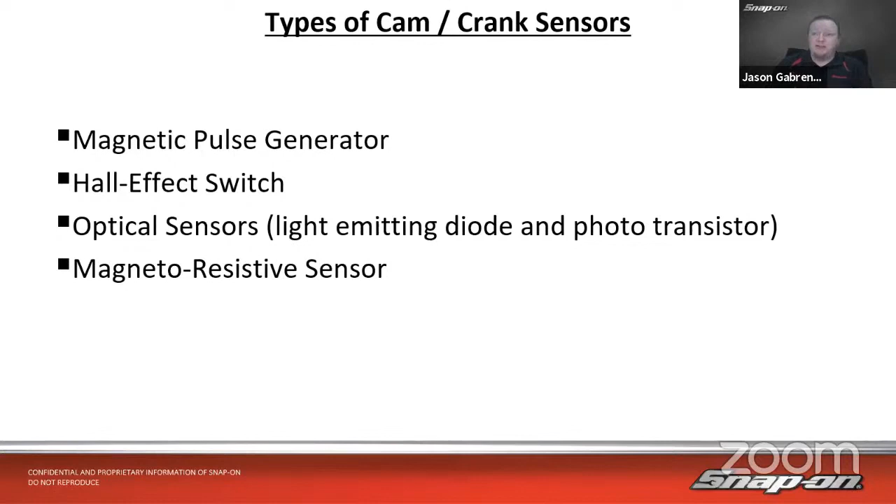So the types of cam and crank sensors we're going to talk about today - there's four main types we're going to cover. There may be others out there, but these are four of the more common ones. We have magnetic pulse generator, we have a Hall effect switch, we have optical sensors - light emitting diodes and phototransistors. If you've ever heard of the OptiSpark system GM used, a couple other manufacturers use it as well, that could be used. And then also the magnetoresistive sensors as well.

First off, we'll start with the magnetic pulse generator. This one happens to be off a Subaru. What it does - you see a cross section over here on the left-hand side, so we have the pinouts for the connector here. It goes in and we have a magnetic core in here, so it's magnetic. And as pieces of metal go by this magnet, it will generate a waveform out the back end.

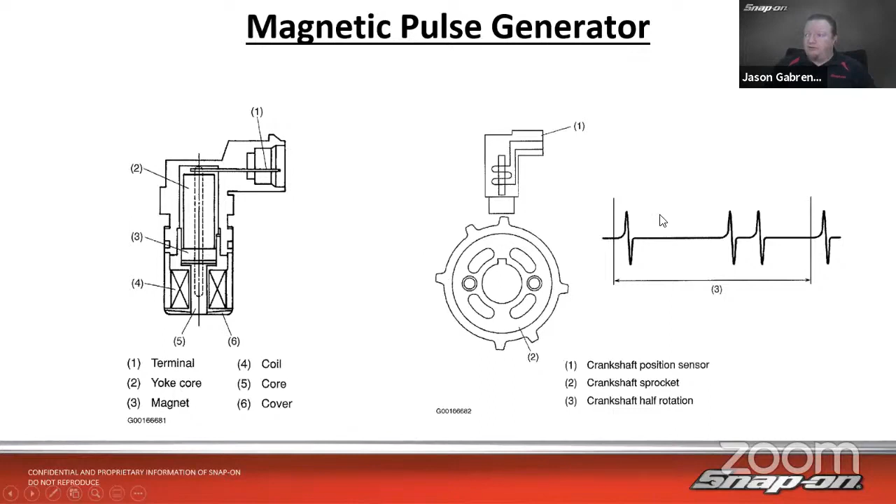Depending on how it's set up and where it's set up will differ in how the signal gets sent out. But in this case, we have just a few - this is the crank sensor right here, so the crankshaft sprocket is where this is. This has a few little blips and it'll send out a blip. This will generally be an AC voltage output, so it works on induction, and it induces an AC voltage output out through it.

Now, the voltage output will also be relative to the engine RPM on these. So the higher my RPM is, the further my amplitude goes up - it'll actually increase the voltage, and the voltage will lessen as we lessen the RPM. Also, with all of these, if we're looking at it on the screen, as the RPM increases, of course the frequency will increase as well.

So those little blips will get closer and closer together the faster it goes, because it's going faster. On these, the coil winding polarity is designed for that specific application. You can't reverse these. Remember how I said there's a positive and a negative? You want to make sure it's connected the right way. Sometimes you could get an aftermarket connector that's not pinned right. And it is a 2-wire sensor, as we said, passive, inducing this voltage output.

Then we get to a Hall effect switch. That's going to be different. It's going to be a toggling DC voltage output, so you'll see a square wave if you were to test this on a scope. It's going to be 5 volts, 12 volts, whatever the manufacturer decided to design it. It is not an engine RPM sensitive signal. As before with that AC output, the amplitude would change, but on this, it doesn't matter what the RPM is, the voltage is going to be very stable no matter what.

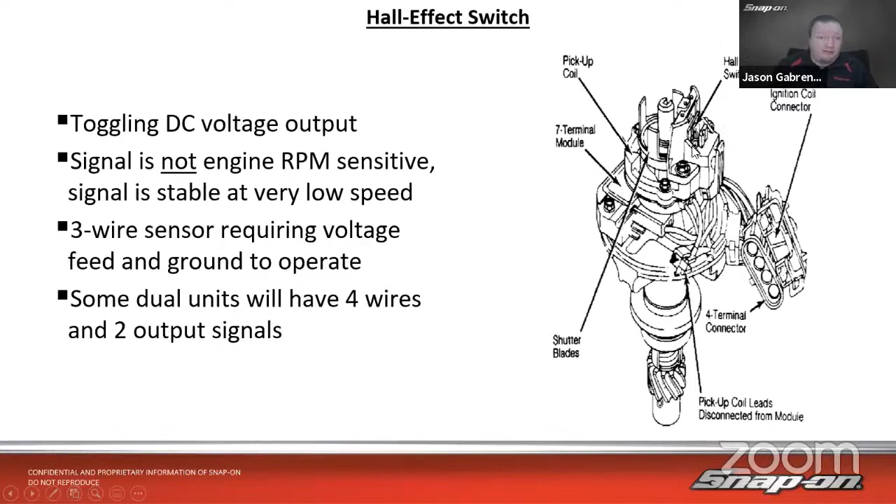Let's look at an example on a real world car we were diagnosing. This is on a distributor vehicle, a 91 Ford F-250, and it was a 5.8 if memory serves me correctly. The problem was it would stall over time. It could be running for 5-6 minutes and stall, could be running for 20 minutes and stall, could be running for 30 seconds and stall.

So it was really an intermittent stalling issue, and they suspected maybe it's the crank sensor on this. So it could very well be the crank sensor. If we take a look, the easiest place to test on this vehicle is out of the guided component test off the scan tool.

We see it's got a 6-pin connector on the ignition control module. On these, it's got that little ignition control module that plugs underneath the distributor. You've probably seen them before if you've been working on Fords for any amount of time. They're very prevalent back then.

And we have these different signals. We have the crank position signal, which they call the PIP. Then we have the spout signal, which is their spark out, that actually comes back from the computer. We have the IDM in certain cases. We have the run circuit, which would be power. We have ignition coil negative, and then we have the ground. So ignition coil control is going to be on pin 5, and then, of course, our ground is there.

Pin 3 is IDM when the vehicle uses computer-controlled dwell; no resistor is used. On others, with push-start systems, pin 3 is the start circuit, voltage high, key on engine cranking only. IDM and IDM resistor are tied in with pin 5 ignition coil. That's not really related to anything we're going to talk about right now, but just know that there is a note in there.

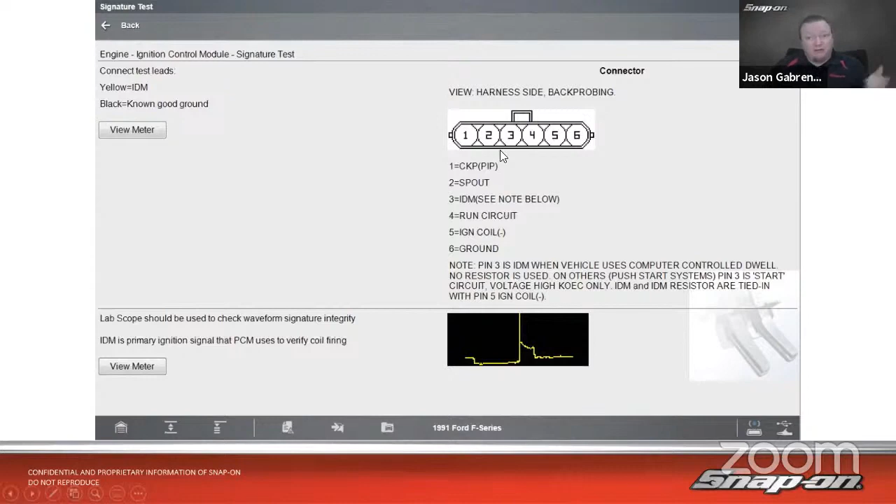So you're going to see that crank position sensor signal come out, go to the computer. The computer sends out another signal to the module, and the module then sends out the signal to the coil. It seems a little convoluted the way they do it, but it also allows the computer to control the dwell on the coil.

So anyways, we decided to hook this up and see why is this truck stalling. Is it the crank sensor? Is it the ignition control module? Is the ignition control module cutting out? Or is it something from the PCM, is that signal not making it back? Since we knew we had this going out to the computer, this coming back from the computer, and this going out from the control module, right, we have kind of that convoluted way of going about things.

But there's my crank sensor signal. Now, another thing I didn't mention about Hall effects, which is pertinent to this case, is we want to make sure if we're observing a Hall effect signal, you see how it's just a square wave, in this case it's 12 volt. It needs to be switching through at least 90% of that range. So if it goes 0 to 12 volts, it needs to cycle through at least 90% of that, because the computer is just going to consider the signal invalid if it's not high enough.

So we want to make sure, and that's especially with Hall effect switches, they can be really susceptible to temperature. Like if it's really cold out, it might not send out the right signal. If it's really hot out, it might not send out the right signal. So if we're testing it with a scope, which would be the best way to test it, you want to make sure you're just observing the voltage cycling through the right range.

So here's my crank, here's my ignition, and here's my spout, as we said. So we wanted to do a recording. We started up the truck, let it record until it stalled, and then we stopped the recording, saved it, and we wanted to see what happened.

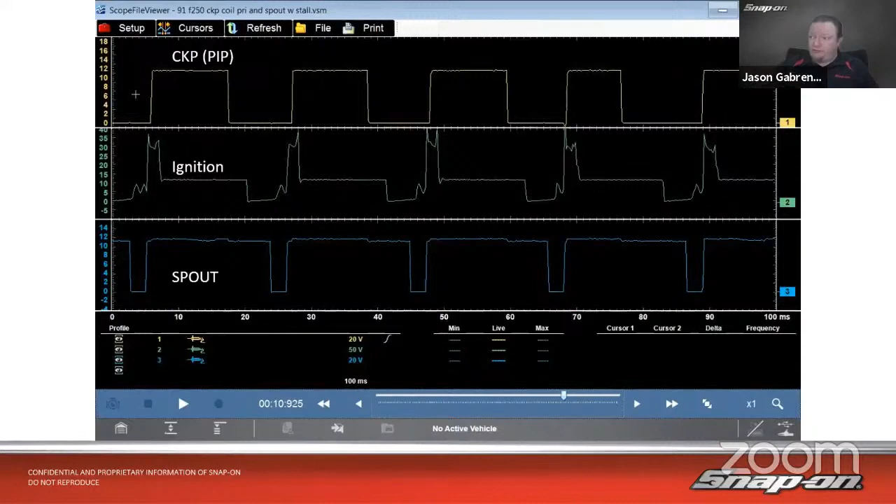So it went for a couple minutes this time. Truck finally stalled. We zoomed out, and then we got the full picture of what was going on with the vehicle, and we wanted to see who fell out first. I think it's pretty obvious that the ignition signal fell out first, way before the crank and way before that spout signal.

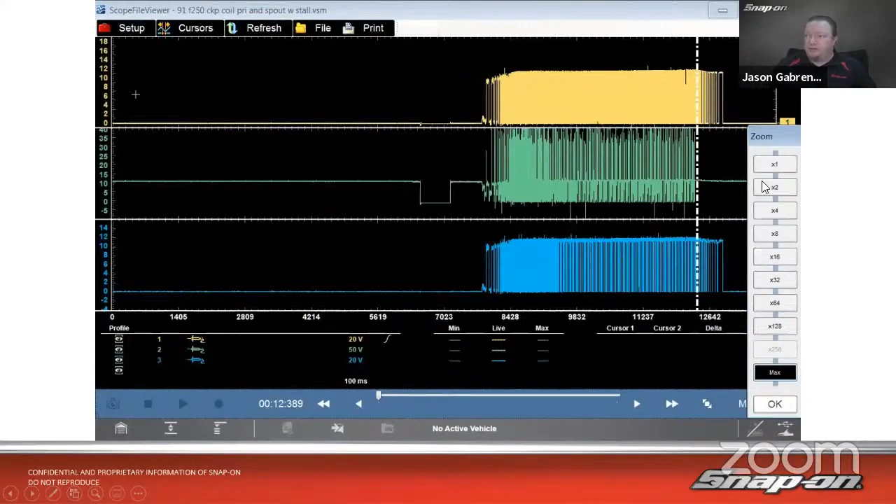So if we zoom in a little bit, we can use the detail controls on here, and this is our area of focus. We're going to move that cursor over there, and we're going to zoom in a little bit. We can see here's where the ignition coil control, or the signal from the module, stopped. And then way over here, a little more than half a second later - wasn't that long of a time, but definitely a little more than half a second - from where that spark cut out to where the engine finally stalled.

Why do we lose crank signal? Because the engine stalled, right? When it stalls, it's not turning, we won't have a signal. And then of course the spout can't come back because that's fed by the crank sensor.

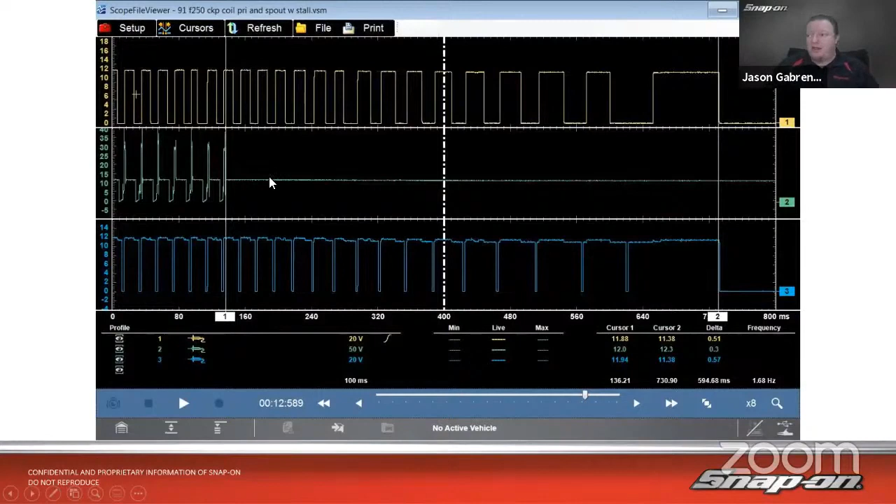So we suspected it might have been the crank sensor. In this case, it was not a crank sensor, but it was a really good opportunity to showcase what you would see with a crank sensor signal, and that's how it controls that ignition. Everything's kind of tied together, right? So who fell out first, which came first, chicken and the egg type deal there. But definitely in that case, the ignition control module was not outputting that signal anymore. So that was a bad module in that case. I thought that was kind of an interesting little example.

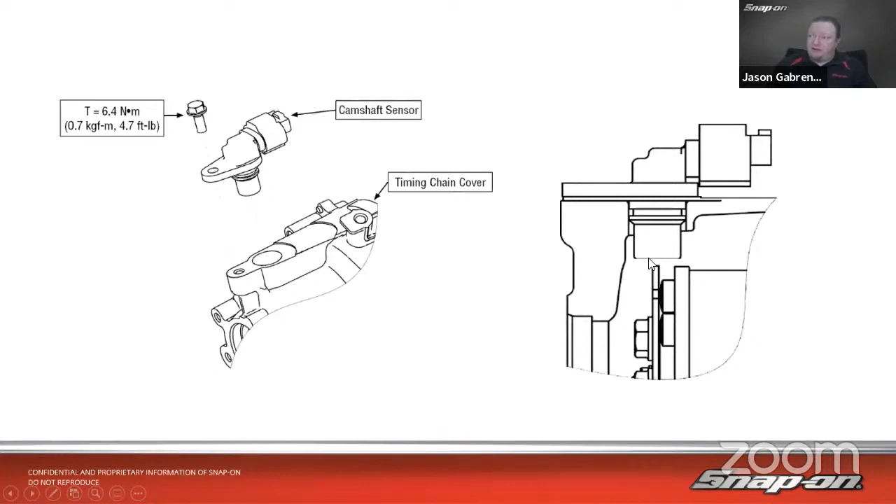Another example of a Hall effect switch. Remember how on that one, on the distributor, we had it going through the window? Another way that we could have it is going to be the other way - so instead of adding material to the signal, we can take the material away from that signal. Here's just another example of a more modern design. This is on a 2011 Subaru. We've got the cam sensor here, and we can see how that sits in the hole in the timing cover. Then we can see how it has this metal wheel below it. So within this air gap, there's the sensor right there, and then there's a connector there, and then there's my metal wheel at the end of the cam sensor.

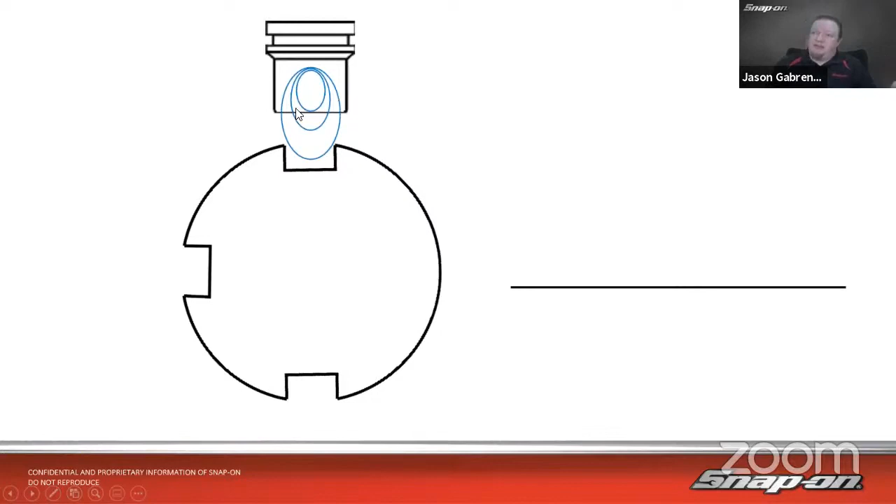So if we wanted to get better detail on that, it's going to look kind of like this. Here is the magnetic portion of this Hall effect sensor, and it is going to generate a magnetic field with power, ground, and signal. I know it's really a 3D magnetic field, I'm not a very good artist, but this is as close as we can get.

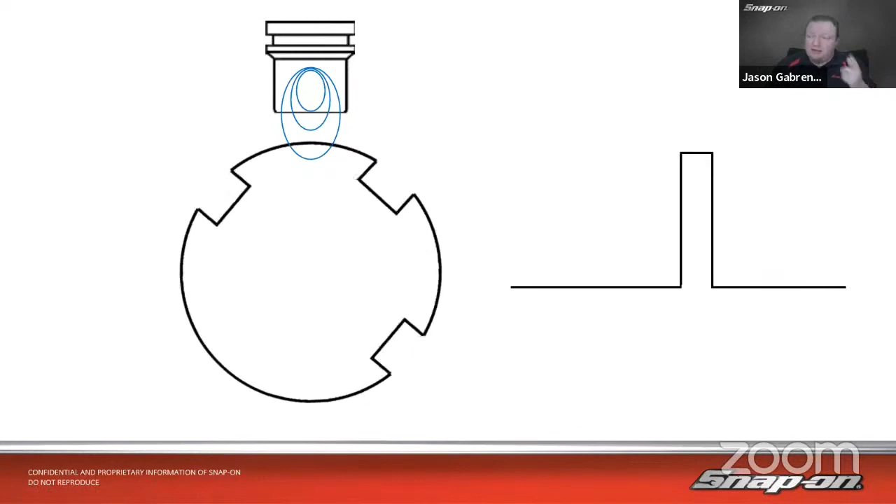This wheel disrupts the magnetic field, and when it disrupts it, it sends out a signal. If we put this into motion, every time that material gets taken away, it generates a signal. On the other way we had it, if material went through that window, it would generate a signal. Either way, whether we're adding material or taking it away, we get this square wave that comes out.

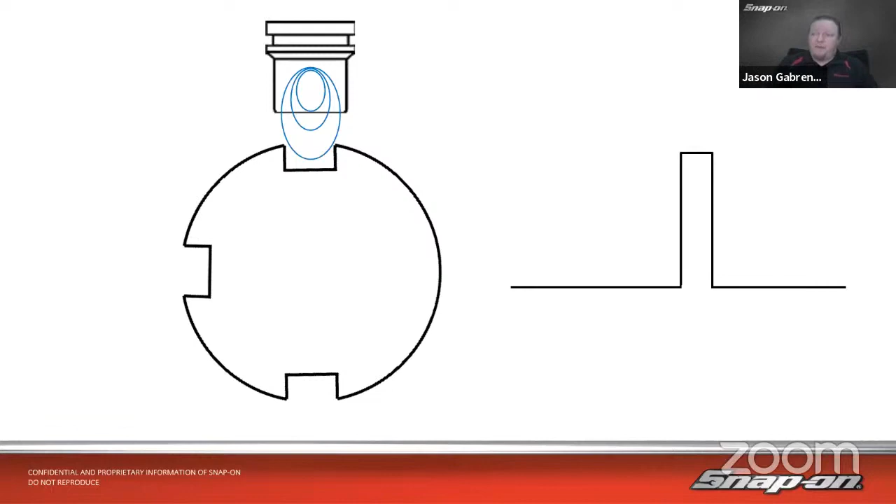In this case, on this car, it's a 5-volt square wave. That's just a couple different ways it can work, depending on the manufacturer and how they decide they want it to function. Definitely worth a little research to understand how that manufacturer decided they want it to work.

Here's another one, and like I said, it's not all that common, especially nowadays. It's probably pretty hard to find these, but they are still out there. It's an optical triggering device. GM had their OptiSpark system. Honda, I believe, had one. Nissan, I know, had one.

The way this works is you use LEDs. Inside the sensor assembly, we see this cross section. We have an optical disc that spins around on a shaft. As it spins, we have light on one side and a sensor on the other side. As the light passes through the hole, it shines on the sensor, which sees that light and generates a square wave based on how that light is flashing on and off. It's actually a fairly simple system, but it had to be kept clean to work.

That was one of the major downfalls - they had a lot of problems with coolant getting into some of them, causing problems. And it just had to be clean, and under a car, not all that clean, right?

So it is, once again, a toggling DC voltage output. We have that 5-volt or 12-volt square wave depending on the system. It's a stable voltage output - throughout that RPM range, the voltage doesn't change. It does require ignition voltage and ground, and most units have 4 wires and 2 output signals because we have 2 different areas on the disc.

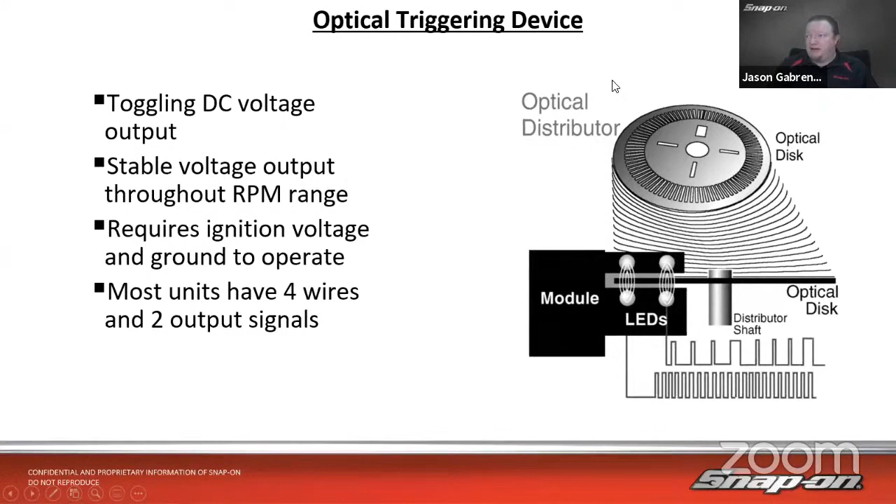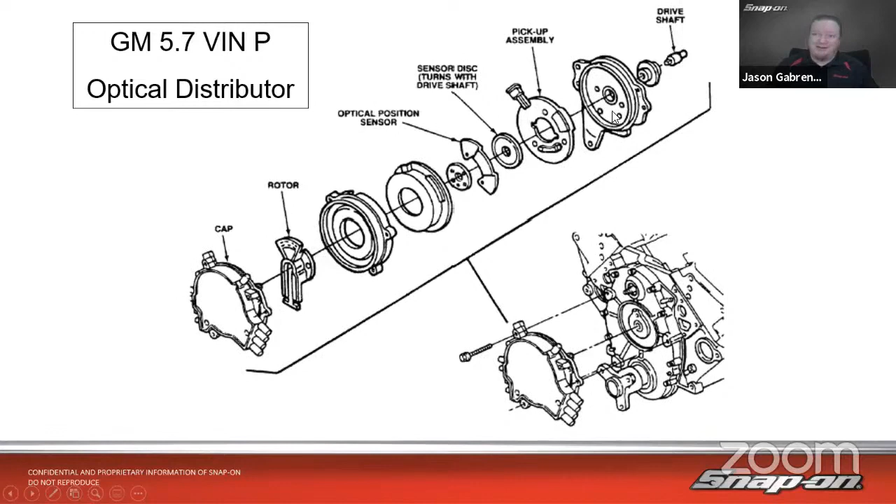Here's just an example of where you'd find that, like on this GM OptiSpark system. There's the pickup, the disc, and the optical position sensor right there, and a bunch of other components inside as well.

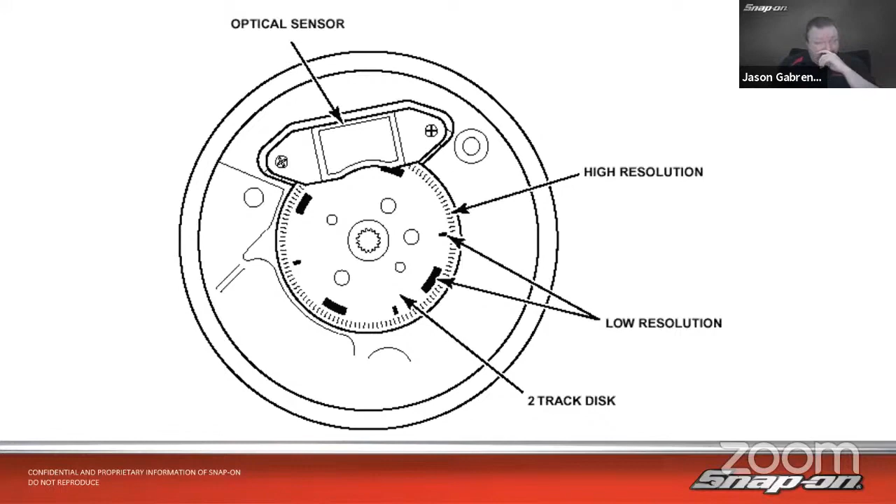Looking at that from a top-down or front view, we'd see that disc has two sensors. We have the high resolution disc, which gives a constant square wave with the same size and voltage, kind of like a check for the vehicle. Then we have the low resolution disc, which has small, medium, and large sizes depending on how the manufacturer cut it, allowing the computer to understand what signal or sensor it's on.

Here's an example on one of those GM vehicles. You see we have a small one, a bit larger one, then another small one, and an even larger one, a small one, and an even larger one. Depending on where it was in the firing order would tell it what sensor or cylinder to fire - if this is cylinder 1, 8, 4, 3, 6, 5, 7, 2, and so on, you'll see how that goes round and round.

All right, then we have our magnetoresistive sensors - boy, I'm just tongue-tied tonight. Typically, there's a 3-wire sensor. It does have that digital 5-volt, 12-volt output like a Hall effect switch. In this case, they are very sensitive to damage, and trigger wheel imperfections will cause sensor noise.

So how this works is we have two sensors on either side of this magnet, north and south pole. My trigger wheel will come by this. It will run by number 1 first, then number 2 second. There'll be a slight offset, and it decides based on that offset, giving us an output signal. So it does all the math inside the sensor, which makes them a little more complicated. Also, in this case, the PCM does not supply 5 volts. The magnetoresistive sensor pulls up 5 volts and then toggles down to ground. So we want to watch that ground side as well to make sure that it's switching to ground quickly.

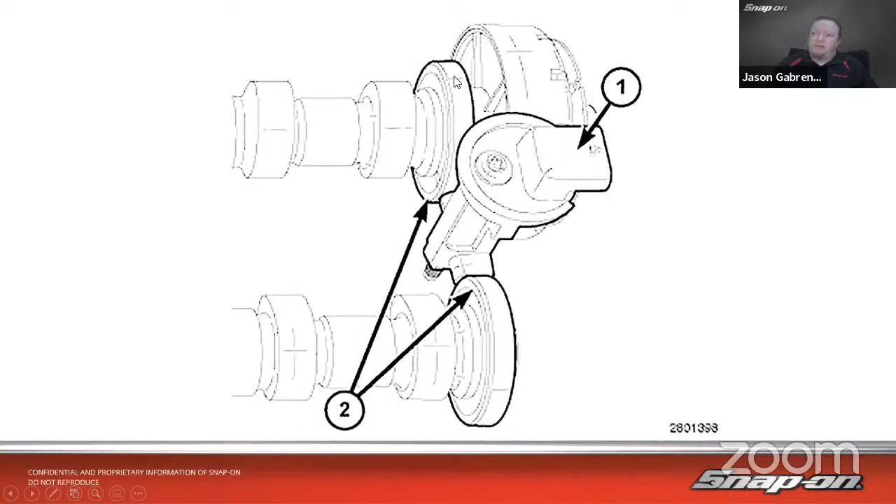So as I said, these are magnets. So when I have wear in my engine, such as maybe these roller rockers running off the camshaft - we got the roller rocker, the valve, the roller rocker, and the cam lobe - well when those roller rockers wear out, or anything else in the engine wears out, you see we got some good wear there. Where's all that metal go? Well the metal goes into the oil. And where's all the oil go? Well, it goes around the camshafts.

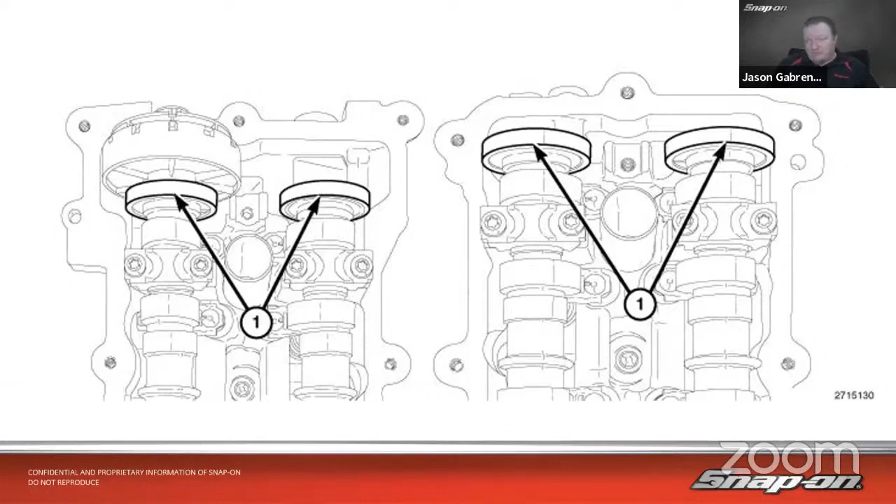Including these magnetic wheels. So the magnetic wheels will pick up this magnetic material because it's iron, metal flakes, ferrous material, and it'll stick to the magnetic encoder wheels. That will cause all sorts of issues - codes, drivability problems, just from that metal sticking to it. And you may not know if you don't take that cam sensor out and look inside that engine to see where there might be a problem. Well, then you might not even know. And it might be as simple as cleaning it up. Of course, by the time it gets to that point, you probably have mechanical damage in there anyways - probably going to be doing a lot of head work. But if not, if you catch it early enough, maybe you can save it. But definitely the magnetic wheels, that's the problem. It gathers that to it.

Now this is all with variable cam timing, and this is one without. And then there's a little article on that as well. Also, we need to remember, so that's on the Chrysler.

Now also we need to remember on multiple vehicles, many vehicles nowadays especially, you also probably have to do some sort of an after-repair reset, relearn, something of that nature to reset the system. So in this case I am looking at a Camaro, 2014 Camaro. Crank position system variation learn procedure is also required when the following service procedures have been performed, regardless of a DTC: if you replace the engine, you have to do it. If the ECM or body control module are replaced, you have to do it. Crank balancer is replaced. Crankshaft removal or replacement, even if it's just removed and replaced. Crank position sensor disturbance or removal and/or replacement. So even if I take it out to look and see if there's mechanical damage, I need to do this.

Variation learn as well. And then any engine repairs which disturb the crankshaft to crankshaft position sensor relationship needs to be done as well. So in this one, we're going to rev up the engine a bunch of times until it learns. The ECM monitors certain component signals to determine if all the conditions are met to continue with the crank position system variation learn procedure. Scan tool only displays the condition that inhibits the procedure. Scan tool displays the signals of the following components: crank sensor, cam sensor, and engine coolant temperature sensor. So you walk through the steps on the tool, and it allows you to reset that system as well.

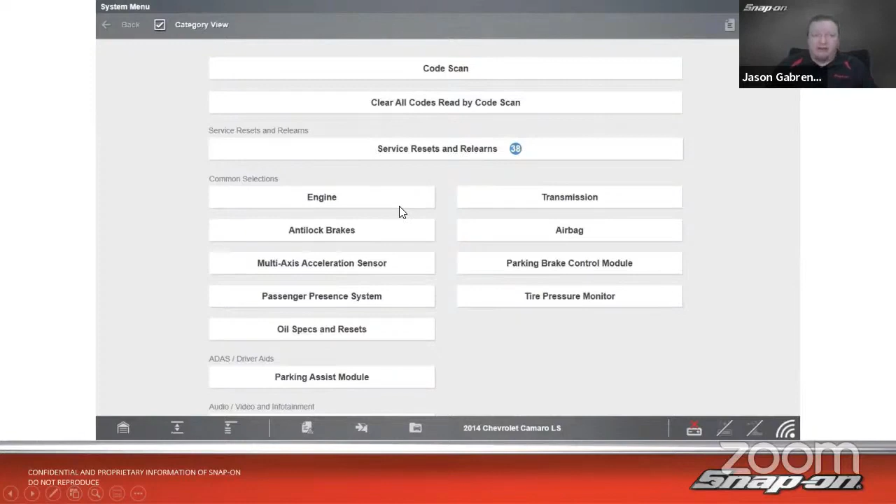If you have an intelligent diagnostic tool, or a Verus Edge, and current software on there, you need a data plan or subscription with the intelligent diagnostic tools. We have a quick link to the service resets and relearns. You could otherwise go into the engine and find it that way, but going into service resets and relearns is a quick way to find them.

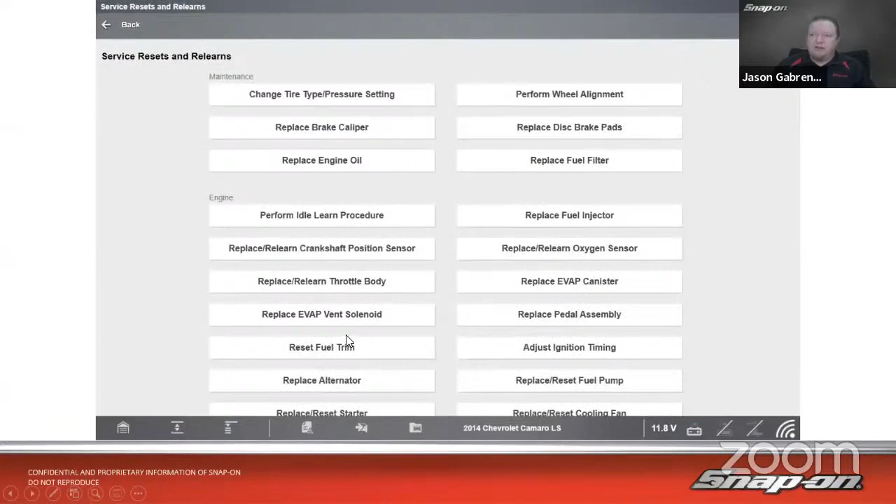So if we go down, we see multiple different things: reset timing, reset fuel trim, perform the idle learn procedure. We can go in here, and there's the crank variation learn we talked about before. We could click on that, and it would walk us through that procedure as well.

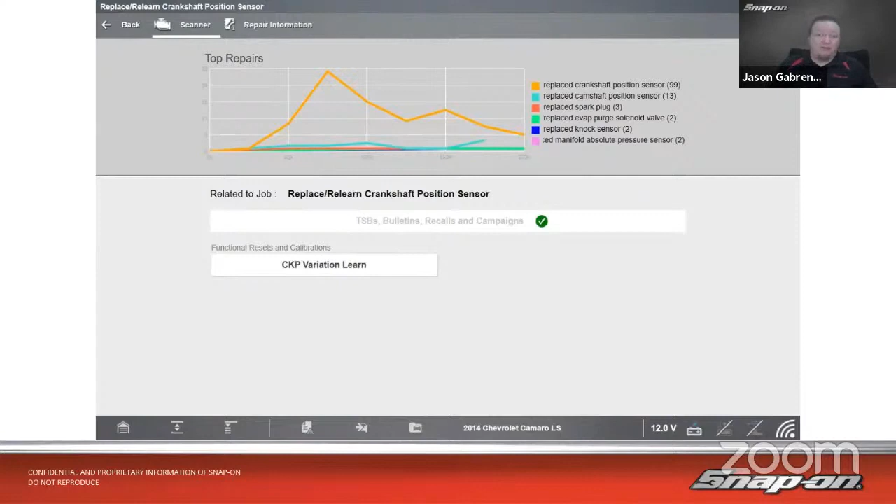So even after I've diagnosed the crank sensor or cam sensor problem, I still need to relearn and reset the issue after the fact, or it's not going to run properly either. So that is our schooling stuff.

Now let's talk about practical applications with the scan tool. So here is my scan tool, and we just activate my car. I got a 2011 Subaru Forester in here. Now there's a wealth of information inside the tool already on cam and crank sensors.

Let's go in to actually look at manufacturer's information. I'm going to go into my ShopKey over here, load my Subaru. There we go. All right, so here's ShopKey, and I have my vehicle loaded. So I'm going to check out the crank position sensor, the CKP sensor.

And then let's say I replace it. So let's look at a little bit of information on there. We're coming here, and we see a few different things. There's some TSBs on it. Actually, in one of my other classes, I talk about a TSB on the cam sensor.

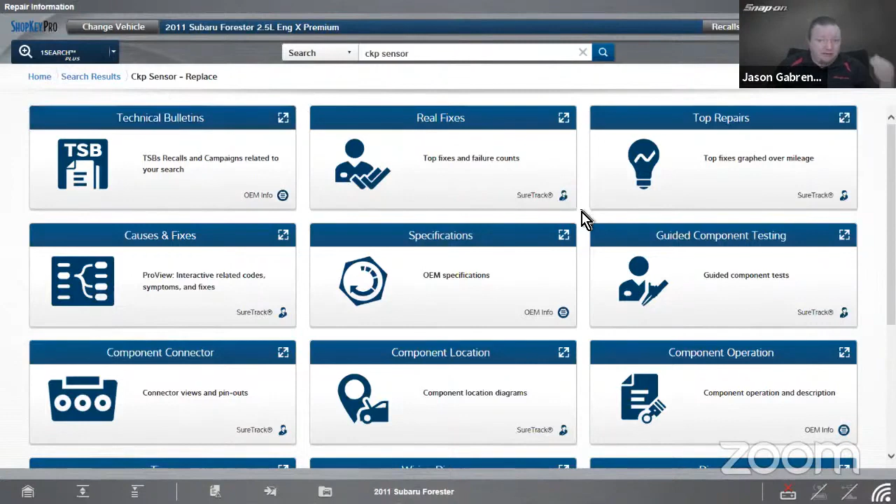Air gap is too big. So if you want to check that one out, that's around. But let's look at remove and replacement, and inspection.

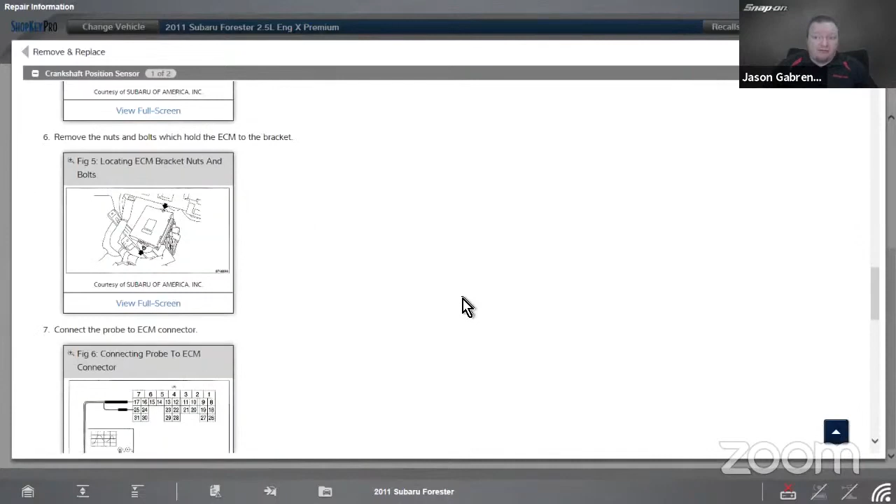So this is kind of interesting. They said measure resistance. Resistance test, that's pretty easy to do. They also give you a method with a scope, so manufacturers are saying you want to test these things with a scope nowadays. So there's just an example of a cam position sensor waveform, or crank position sensor, on this vehicle.

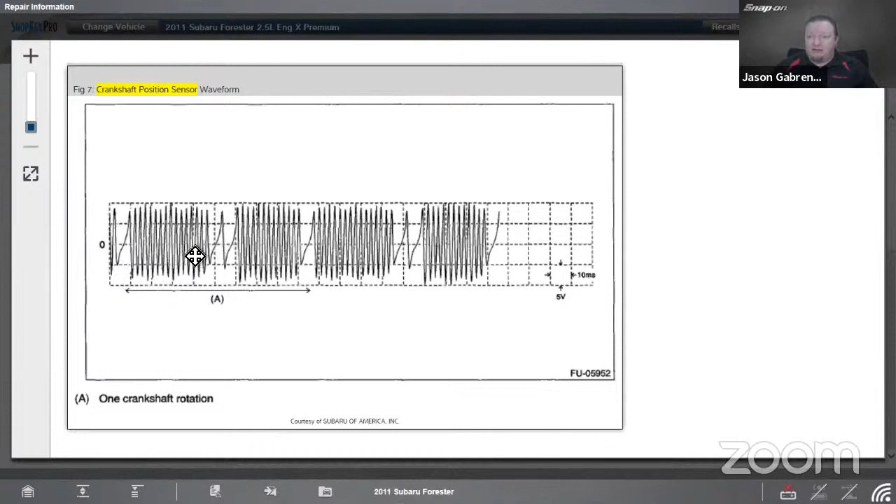This is a 2011 Subaru, and we can see the crank sensor information right there. So there's the scope patterns, what it will look like. Notice how it's on either side of 0, which means it is that analog sensor we talked about at the beginning. So that is interesting that they have you do that.

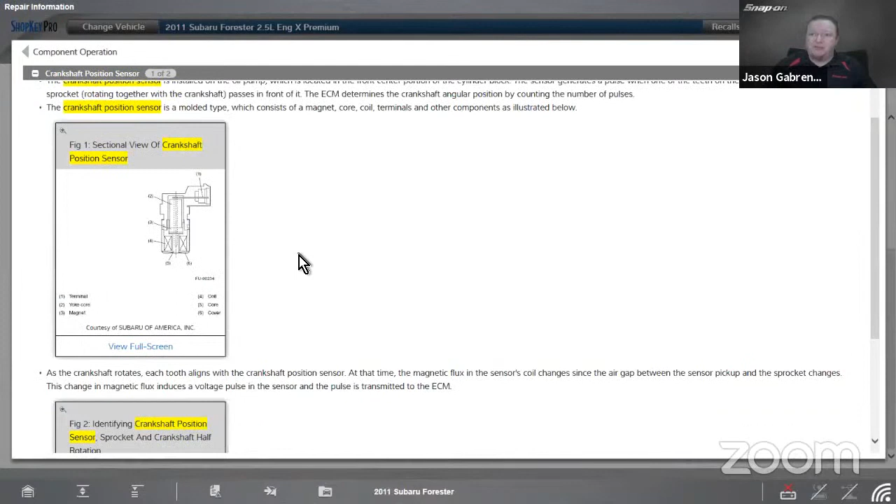If you go to component operation, it gives us that side view of it. It's molded, consisting of a magnet core, coil terminals, and other components as illustrated below. As it rotates, it generates a signal out to the ECM. We see on this, we have teeth all the way around, except we have a gap here, and two gaps of the same size over here. So they call that a single gap and a double gap on this car.

And then we have all these other smaller signals, that's where it sends these signals out. These are the small ones. There's the double gap right there, and then there's a single gap right there. So half a rotation gets us either through the double gap or the single gap.

That's important to know and understand if we're going to try and do some more testing on this that we're going to talk about in a couple minutes. Also important, I don't know if any other manufacturer is affected by this. I bet you they probably are. I've never seen one in person, but I know personally I have seen it on a Subaru. In this example, if you remember earlier in the class, I showed a diagram with like 5 teeth on it, very widely spaced, maybe 5 teeth all the way around. This one has many teeth all the way around.

So that engine could still fit in that same car because it's the same engine block. They just decided to change the crank sensor logic on the vehicle. So if you put the wrong crank sprocket on that car, because they made a mid-year change around 2004, they went to this new logic. So if I have an older car, that 2004 engine will still fit inside that car.

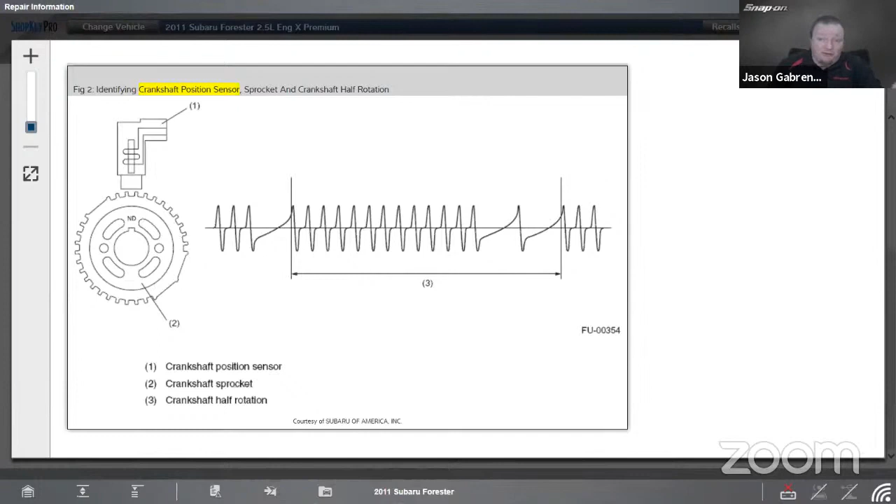So if I put a 2003 engine in a 2004 or 2005, I would have the same problem. I've actually seen that happen before. All you got to do to fix it is swap the crank sprocket, and everything will work. They just changed that logic, so you got to watch out for that, at least with Subaru. I'm sure other manufacturers are probably the same way.

So that gives you a known good pattern there. And then if we come up here to my specifications, it actually gives me, which is really nice, a cam crank correlation pattern.

Now this is a cam crank correlation. We get asked about how to do a cam crank correlation test on a car many times. There unfortunately aren't any presets in here, but we can go and examine one that we've taken off another car. Let me just switch over to my ShopStream Connect here.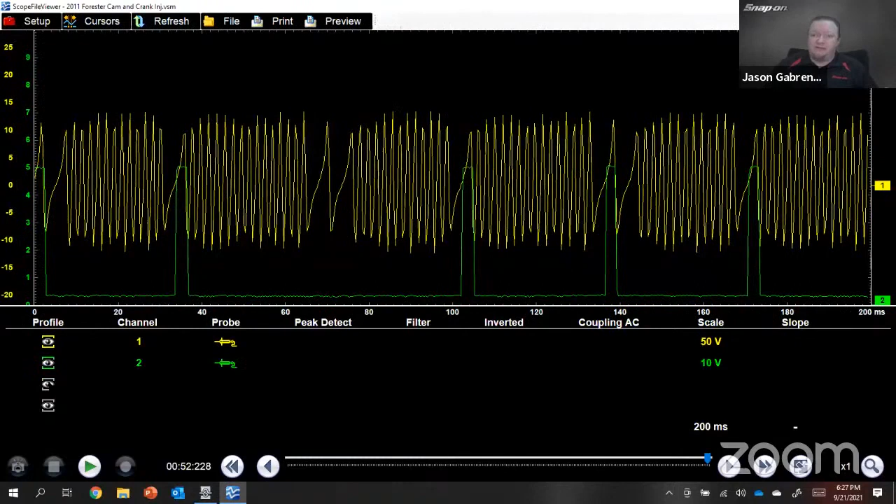And if I turn on channel 2, that's going to be one cam sensor. Channel 3, that's the other cam sensor. And then channel 4, what I did here was I added in a fuel injector.

So what you want to do when you're trying to see how everything lines up, you need to be able to trigger off of something. So a good suggestion on tests like these, where I need to see one instance of the firing order, 2 rotations of the crank, I want to have some sort of a trigger point to see, okay, here's where I'm lining up on cylinder 1. And then if I know the firing order, I can understand after that.

You can use it for this, you could use it for ignition, and so on. You can use the injector, you could use an ignition coil. It just depends on what's easiest to access. In the case of this car, the injector's right on top, nice and easy to get to. You just back probe the injector, and there's cylinder 1.

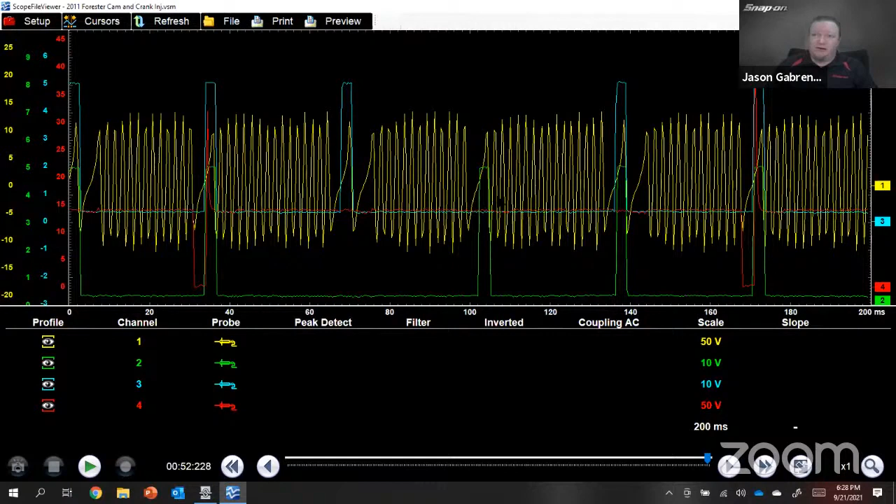Now, I will tell you there's a lot going on right here, and it's kind of hard to see. So what I want to do first is change my setup and change my view to do 4 windows on the screen. There we go, that's a little bit better. Now I can see a little bit better what's going on here, it's not all jumbled together. And that looks an awful lot like the screen we had before, where I have my 2 cam sensors and my crank sensor.

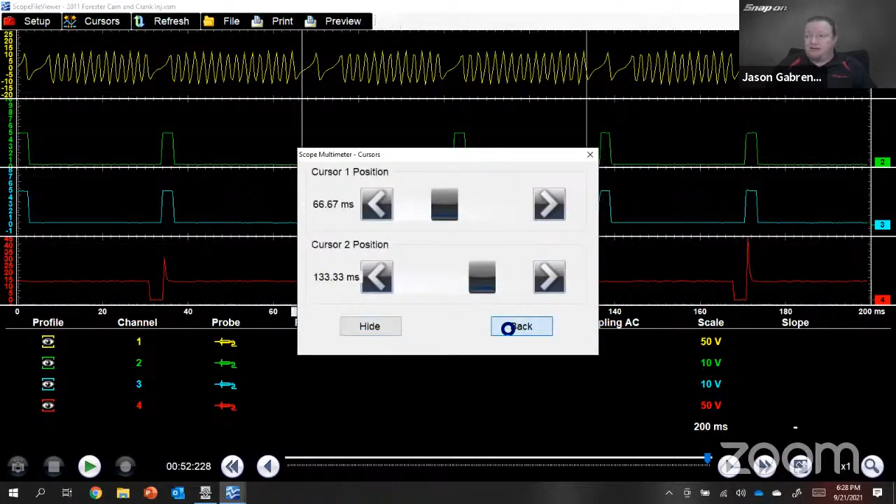So now we're going to do a little bit of math. We got to figure out, is this on or is this off, what's going on with this. In this case, I know it's a known good pattern, so I can see and I can measure. We're going to go through a little bit of math. I know math is super fun and exciting, right? But math can help us when it comes to these types of things. We're measuring rotation in degrees and how far apart they are.

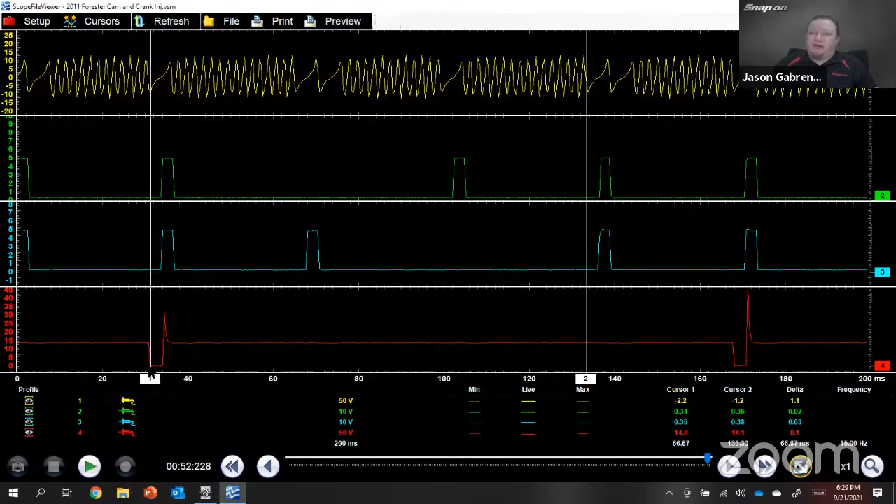So first off, let's go, I'm going to put cursor 1 right here, and cursor 2 back over. Well, there's one crank revolution right there, and there's 2 crank revolutions right there. So we know the crank turns twice every time we go through the firing order. Another way I can verify that as well, my injector fired there and the injector fired there, so that's the same cylinder right there. So one time through the firing order, 1, 3, 2, 4.

There we go. Okay, so from there to there, I'm on pretty much the same part of the waveform, right? Little dip right there, little dip right there. So this tells me 136.88 milliseconds is how long it takes to turn 2 times.

So now if I want to figure out where each one is, let's just call it 136 to make it easy. Let's pull up my calculator. 136, and first off, let's divide it by 4. That gives me 34. So that means 34 milliseconds happens for each stroke of the engine.

So if I take number 2, it should be right about where that gap happens again, and sure enough, 34.25 milliseconds. If I move it again, we should have 68, and sure enough, 68. If I move it again, that should be 102, and that is 102 right there. So each of these is one of the strokes on a cylinder, so there's my 4-stroke engine.